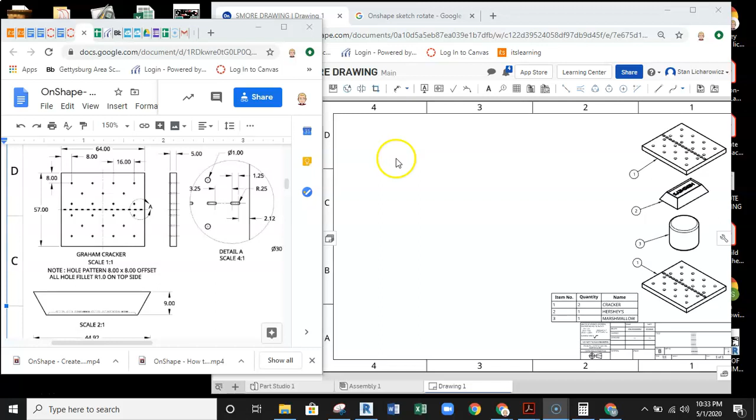Okay, in this portion of the video series, we're going to go ahead and set up the multi-view drawings for the graham cracker, the chocolate bar, and also the marshmallow seen here. So let's go ahead and start up here with the graham cracker and jump back into OnShape.

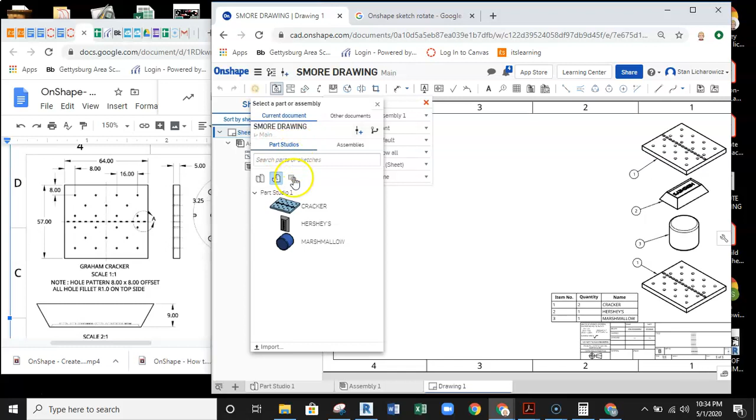We're going to go ahead and start looking for the insert view. From here, I'm going to hit the insert tab. I want to work with the part studios, and there's my graham cracker. Go ahead and select it.

I want this to be a 1-to-1, and I want to set up my front view the way that I want this to be seen. So I'm going to go ahead and start picking these different views to see which one of these is going to give me the view I have set up here.

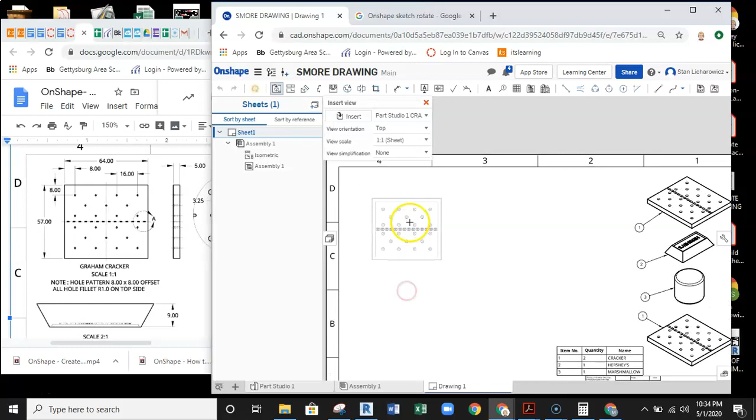And it looks like for me that top view is what it's going to be. So I'm going to go ahead and drop that top view, which is really going to be technically my front view. And then I'm going to go ahead and set up my right side view.

Now, it's not necessary to have a front, top, and right in this particular instance because you're going to gain all the information you need from these two views.

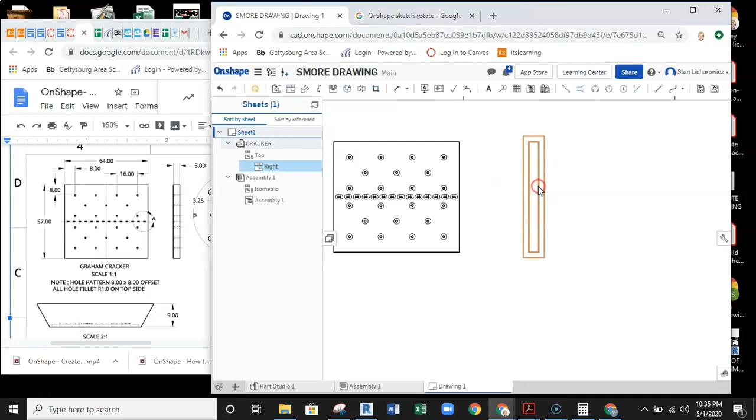So one of the first things I'm going to do in this particular instance is turn on these hidden lines because I want to show the hidden lines, since there are holes that run through there with little tiny fillets on the top.

And the other thing I also want to do is set up this detail drawing view, because we're going to be dimensioning that as well. So I want to make sure I have space for everything that I need to do here. I definitely want to pull this down a little bit.

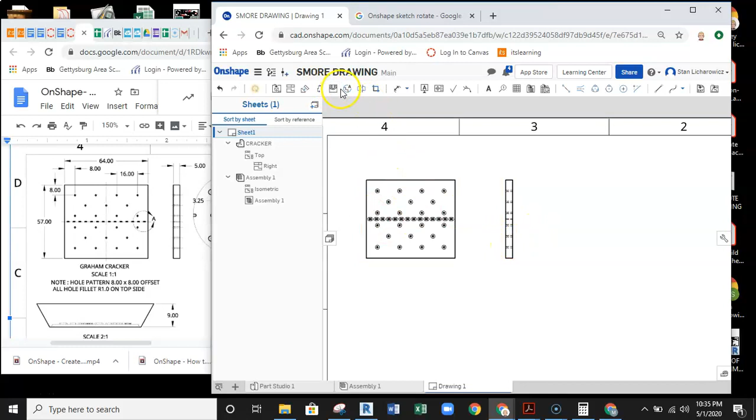So to do that detail drawing view, I'm going to grab that detail view, and I'm going to zoom in because I want to think about what I actually want to capture. What I want to capture is shown here inside those two arrows pointing at that A. So the center of my view is going to be right around here.

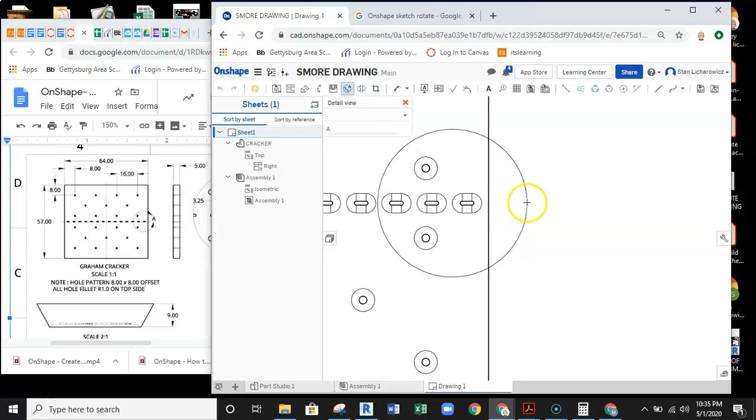I'm going to click and start pulling out, and then where my cursor is is where that A is going to show up. So I'm going to pull into about here, and then click again. That's going to go ahead and set up the view.

Now here's my view. I'm going to pull this over and then drop that in position. Now, this is telling me that it's a scale of 2-to-1. I'm going to go even larger than that. I want to go 4-to-1.

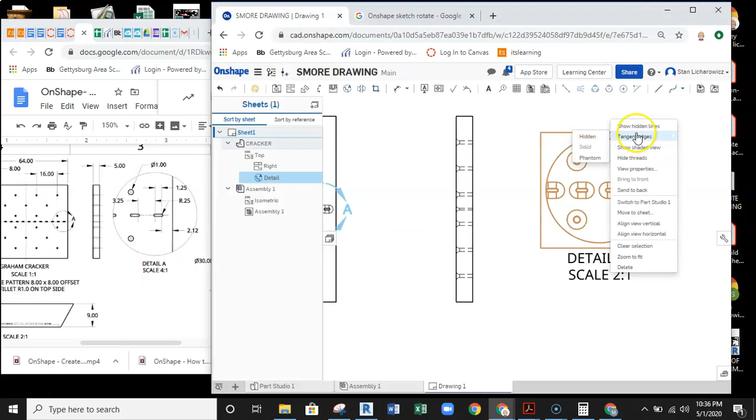So I want to go in, right-click, and get to the view properties on that. And we'll change those view properties to go 4-to-1, and it's going to get a whole lot bigger.

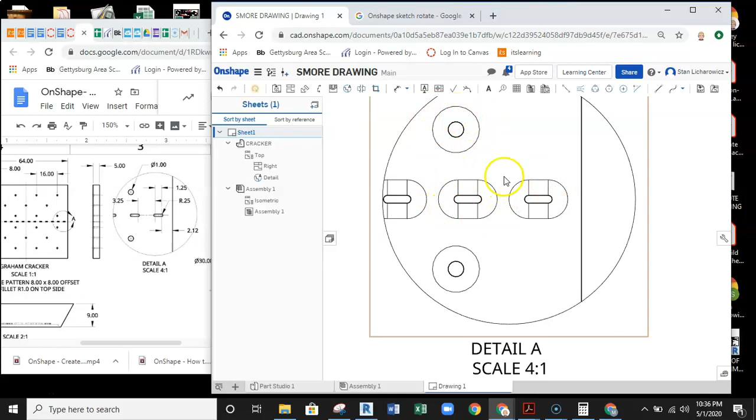What it's also showing here, these circles, they are the tangent edges for all of those fillets. I don't want that, so I'm going to right click and set tangent edges hidden. I don't want to see all that.

All right, so next thing I can do here is start adding all of my center marks and center lines. There's my center mark tool, and these little center marks are just perfect for what I'm working with here because these are such small features.

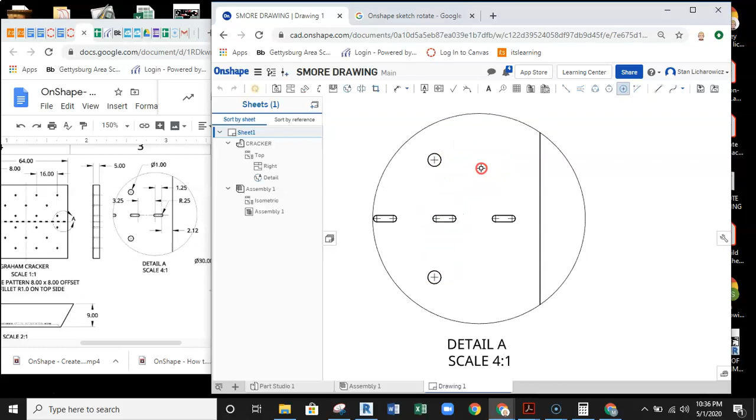I don't need to do any sort of extensions or anything like that - it would just make things a little more confusing. So I'll go ahead and grab dimension for this particular object, and it looks like I got a small issue here. Might need to go back in and update that.

Actually, what really needs to get updated is not the part itself, but the drawing units. Because remember, I'm in an ANSI A drawing file. I never set this up and told it that I'm running in millimeters.

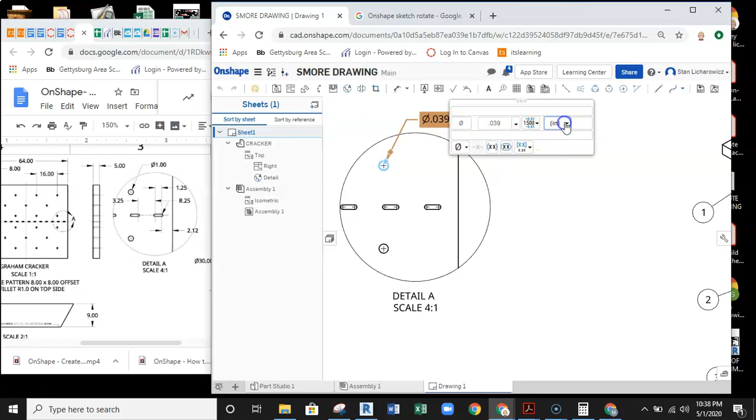So what I could really do here is select each one of these, right-click, and go into Edit, and change inches to millimeters. And we're not going to do all that - it's way too much work for each one.

If you hit this little wrench over here, then you can come over to the drawing properties display. I can just fly out here. This units can be dropped down and set to millimeters. So we can set this up in millimeters, come back to my drawing, close that, get rid of that fly out, and there's my 1.00 millimeter.

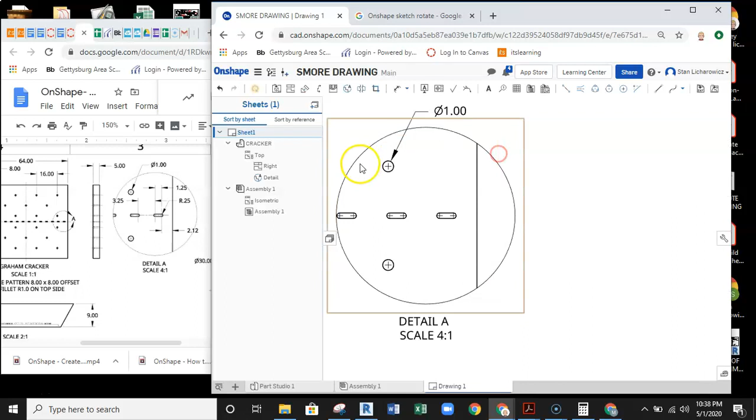So again, don't freak out if your dimensions aren't working right. It's not a problem, it's a units issue.

So with that set up, now we can go ahead and continue to dimension the rest of our parts. I'm going to go ahead and grab that radius, which should be 0.25, and that's correct. So pull that up into position. Now I've got to get the distance from center of slot to center of slot.

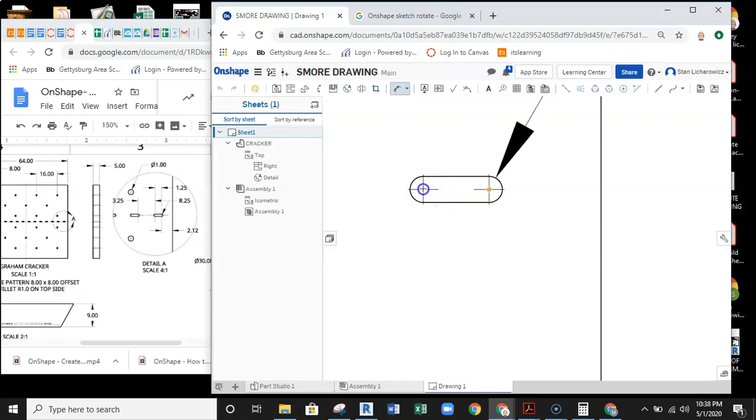I'm going to grab that there and do this again. Maybe I'll go from center mark to center mark - good thing I have center marks on there. So we'll pull this up, pull it out here to the side, and drop it into position so it's out of the way. Now I need to get some information here between these objects.

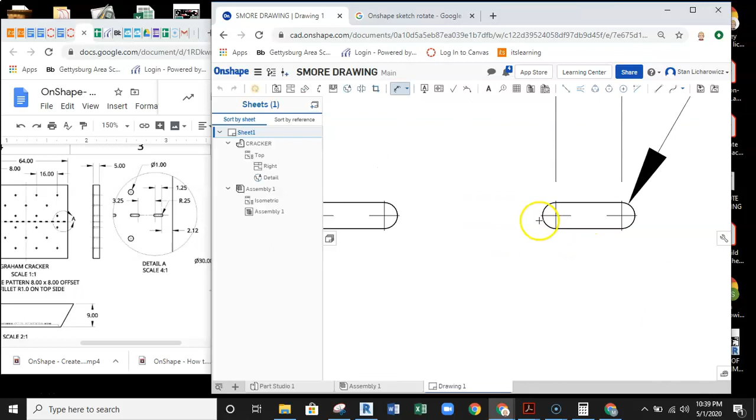Let's see if I can use center mark to center mark this time. That works. So if I pull this up, it might get a little cluttered - it's not too bad. I got to add some more information down here, so maybe I'll drop it over here like this. So that's the distance between there.

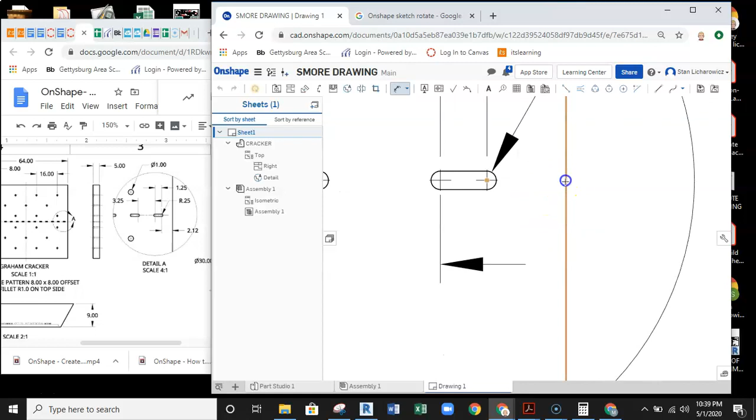And now I got to figure out how far from this edge over would I create this part. So we're going to set that up as well, and pull this down and move my mouse over here to set this up to be a little cleaner than trying to shove all this stuff into that small space. So as I pull back out and take a look at this, I can see I've got everything showing up that I need to. So now I can keep moving on.

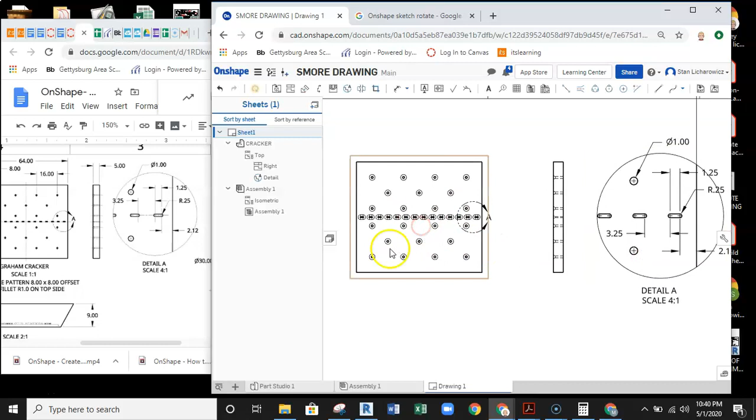I'll come over here to the graham cracker, and let's go right ahead and start dimensioning from - let's just start up here from this top corner. And we'll start with the smallest dimensions first.

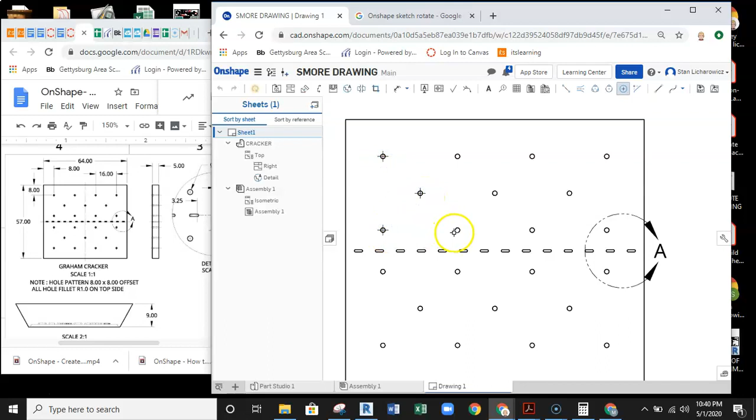We'll grab - nope, wait a minute. We don't have that, we have tangent edges on, and we don't have center marks. So first thing is to select, right click, turn off those tangent edges, and then I'm going to grab my center mark tool and work my way carefully through all these different little holes. Sometimes I really wish there was an automated center mark tool for something like this - you have to do some research on YouTube and see what's out there to make this thing work that way. So with that set, we're good.

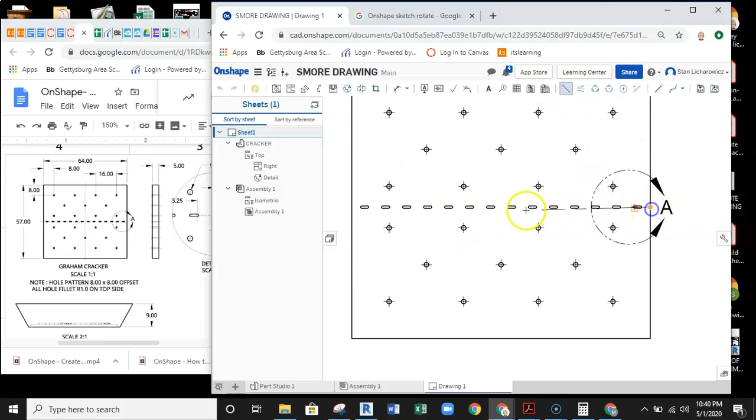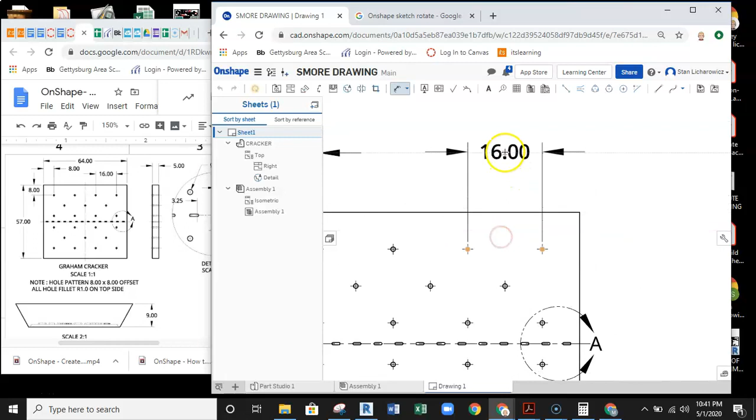Now we'll go ahead and throw a center line right down through this part because it is a symmetrical part. Center line tells us that one side is the same as the other, so we don't have to dimension everything. So now we can go ahead and start dimensioning the positioning of these particular hole features. That one is going to be positioned like so, and then we'll set this dimension to position this 8x8. We'll also add that note down at the bottom of this part. So keep going here and get this thing tidied up with the dimensions necessary.

57, 8, 64 - we're all good there. Now let's go ahead and get the rest of the notes set up here.

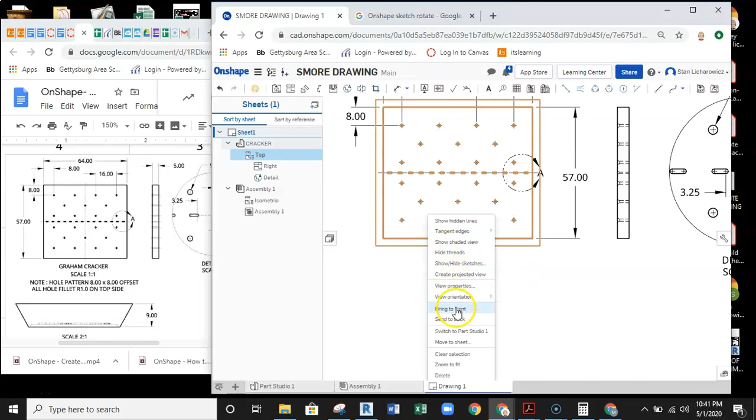So I want that scale to display. I'm going to left click, right click - can I find some type of properties here? Let's see, view properties, what do we got going on here? Yep, so let's see, scale label - I want that scale label to turn on. There's my scale label, good.

Now I also want to add some notation. So now I'm going to grab my A for my notes, and I'll pull a little window - see if I can stretch that out. Yep, that works. Select inside here and I can type this in. So this is my graham cracker - could probably also just call it cracker, but graham cracker is fine.

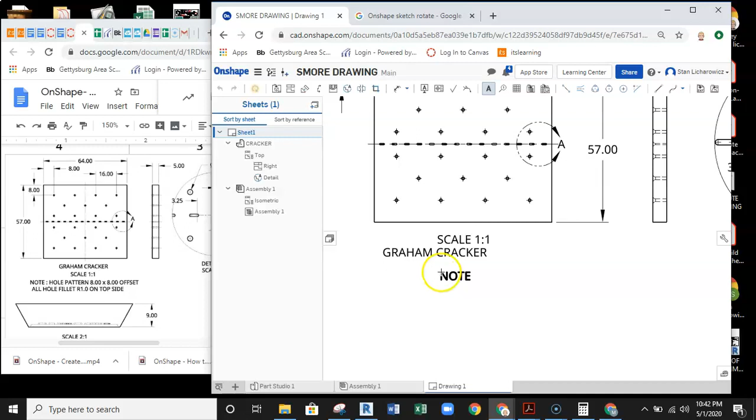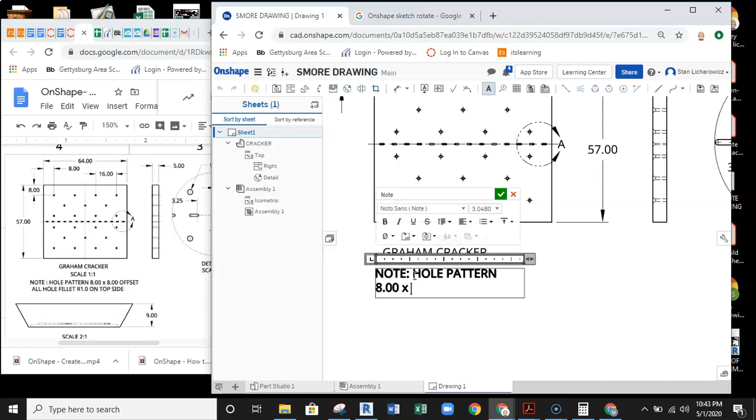And then now next thing, so I'm going to add this note for that hole pattern. All right, oops, spelled that wrong. There we go. So, a hole pattern, and I want this all to be up on one line. If I can get that up on there, good.

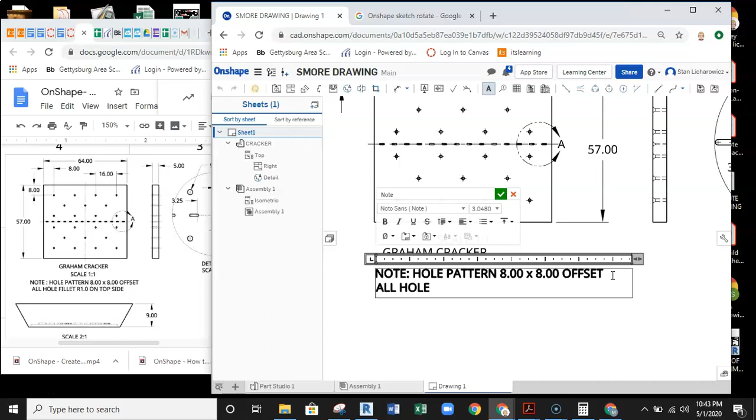Next thing I want to do is go down for a next line and then tell it that all holes get a fillet - it's going to be R 1.0, and that's on the top side.

Okay, there we go. So we have our notes, we have graham crackers set up, and I'm probably just going to do a little positioning here and make this look a little neater. Pretty much looking good.

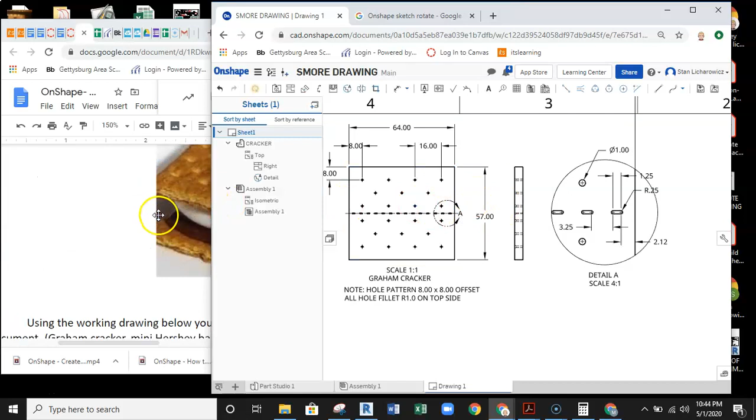Oh, one thing I did forget though is I can see I don't have my center lines set up here for bisector center lines. So we're just going to come in here real close and start adding these bisector center lines into this part so that you can see where the centers are for these little features. And these do help when you're trying to look at a drawing.

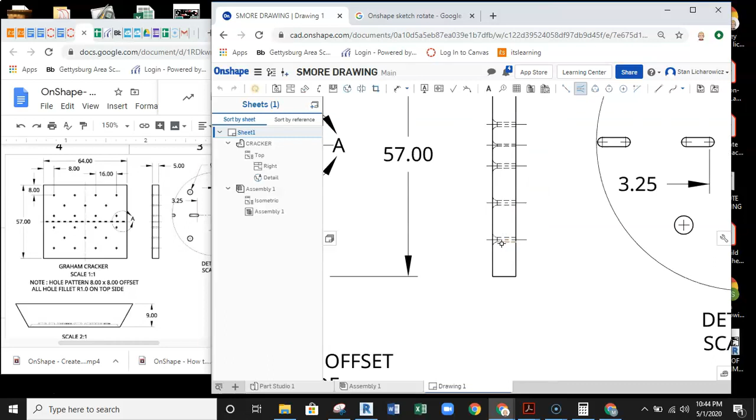Because with small features sometimes it's tough to see. All right, and oh, we also don't have the thickness of this part, so a few more things got to add here. So there's the thickness of this part. Drag this out here to the side. There we go. All right, now I think we're ready to move on to the chocolate bar.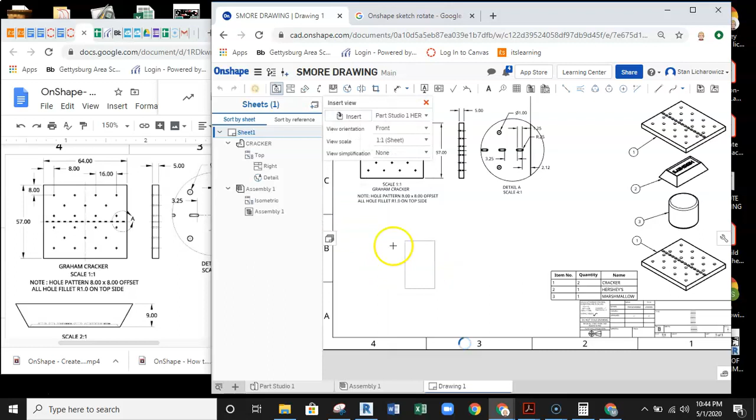All right, so we'll go ahead and grab the insert tool and hit the insert button again. This time we're going to grab that Hershey's chocolate bar, and we're going to set this up. The view for this thing is actually larger, this is a 2:1, so we can see a little bit more information on this drawing. So we're going to find that as a 2:1 in here somewhere. There's 2:1, grab that.

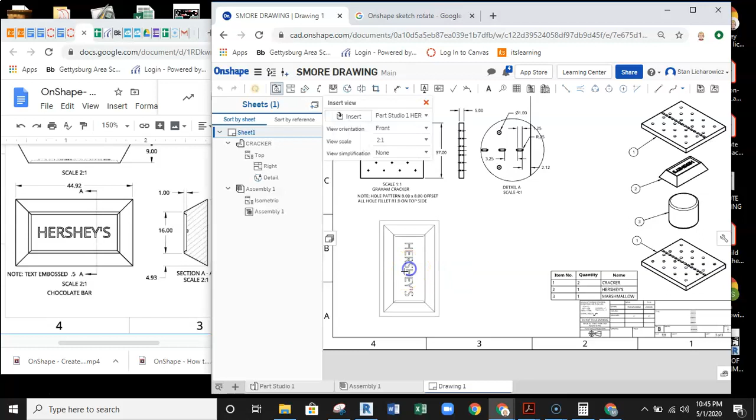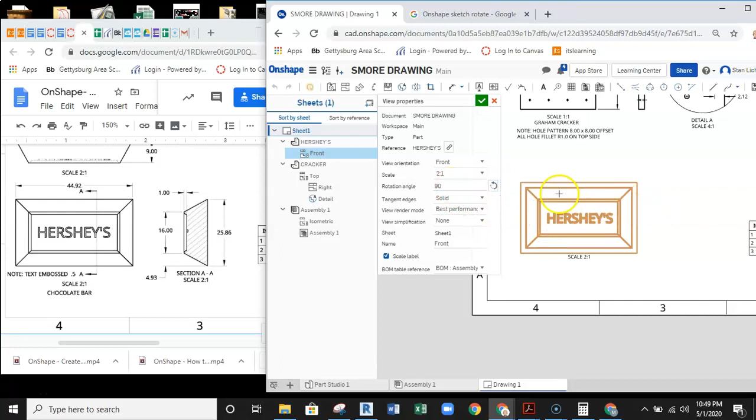We also want to set the view up, so we're going to have to do some movement, rotation. This would be the front view, but we're going to have to rotate it. To do that, I'm going to select the actual view, right-click on the front view, hit Properties. You can see there's a rotational angle, so I want to set this up. If I take this to 90 and hit the rotation button, I can see, well, I went 90, but now it's upside down. So I'm going to tell it to go 90 again, and now it's in the right position, by just hitting this opposite direction. So now it's in the right position. Hit the green check. Now I'm ready to continue laying out my parts and drawings here.

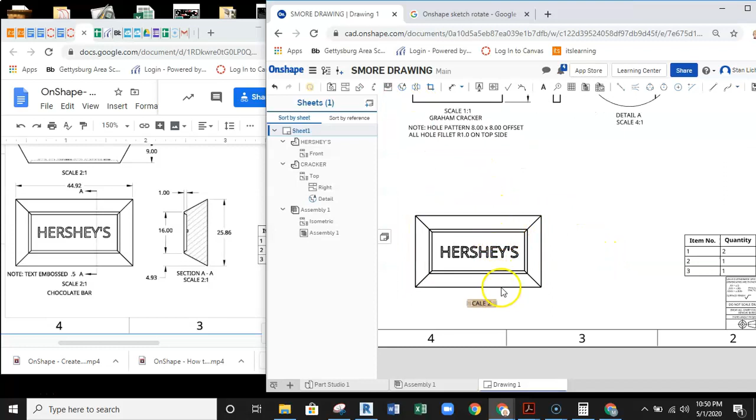So I'm going to move this down just a little bit and go ahead and set up that section view. A section view is as if a knife has cut the part in half. The section that the arrows are not pointing to is then removed, and you're looking at the actual material that's left on the right side. Think of these as knife marks on the material, knife marks on chocolate.

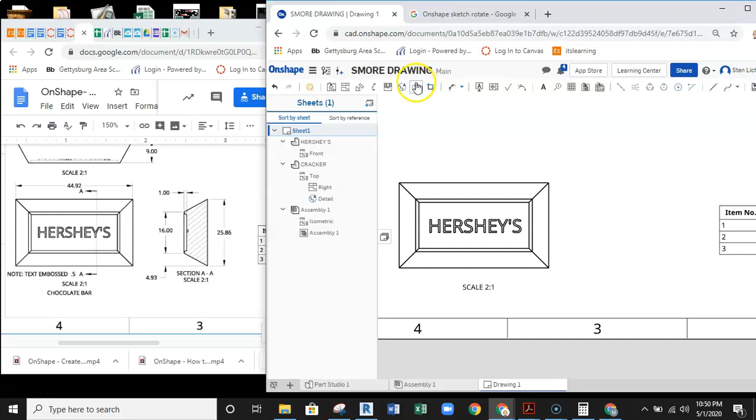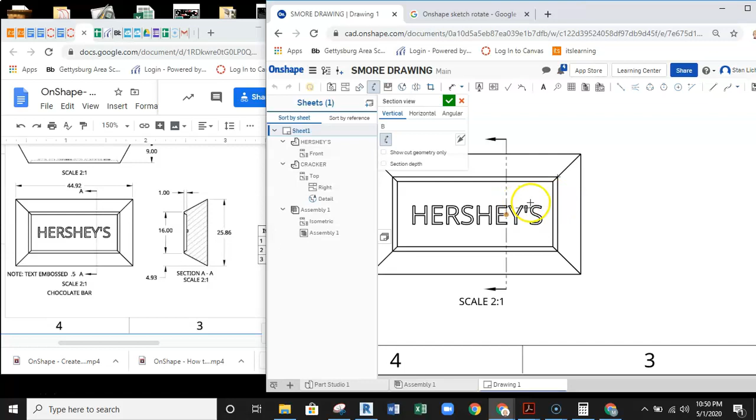So to do this, I'll grab this tool, section view. I'm going to select, this is centered on the part, and just move in somewhere about here and click. Find somewhere right there, click. So now I'm on the end of that E. Now I want to tell it which way to take my arrows, so I want my arrows pointing towards the start of the Hershey, and as I move my mouse over to the right, you can start to see that section show up. With that in position, I'm going to left click, and that will create my section view, and now I have a section view set up.

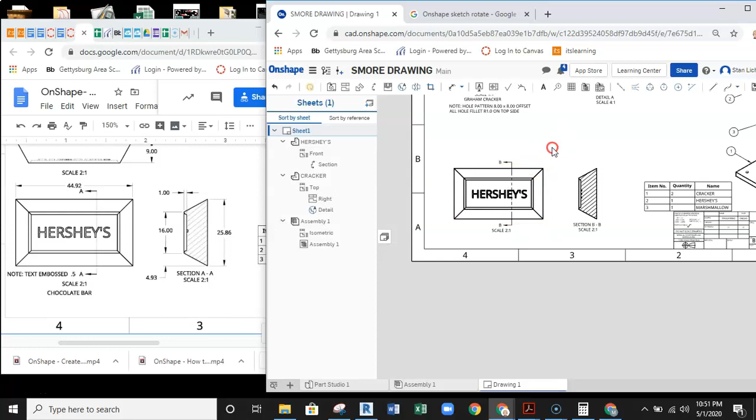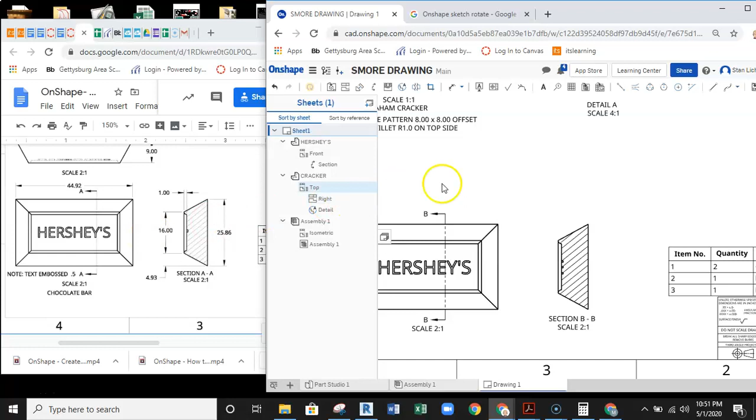Now, a section view should always, if this is the first section view on a drawing sheet, be set up as AA, but given that I did this detail first, this will be A, and this feature will become B. That would be fine for this particular drawing. If you look at this sheet, you can see, well, they both say A, and there are conventions that say you could go AA or AB. I'm not going to be a stickler for this in this particular instance.

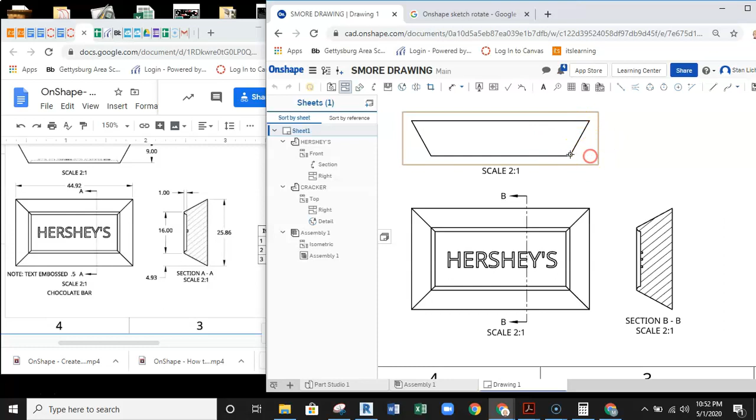All right, so with that in position, we're going to set this up and continue to dimension these parts. We'll go ahead and grab the projected view, pull this up into position and drop that. We'll right click on this and get the hidden lines to show up. Escape, right click, hidden lines, and we'll get the hidden lines.

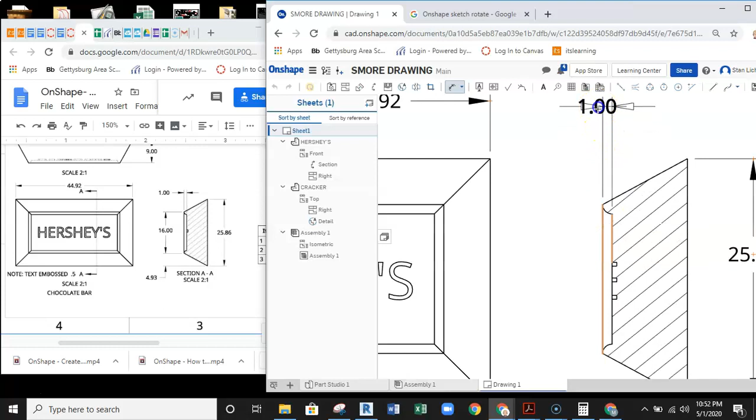Now we're just going to go ahead and add the rest of the dimensions to the part. Pretty much from here on out, this is going to be standard dimensioning, and the rest of the information you would have already been definitely acquainted with. So I'm not necessarily sure we need to continue through the rest of everything here or not.

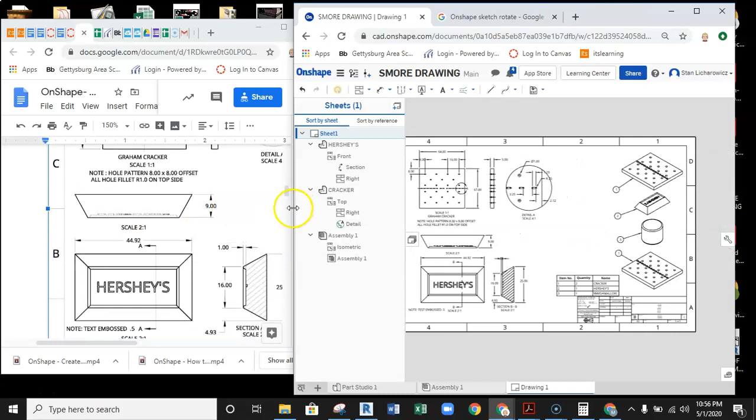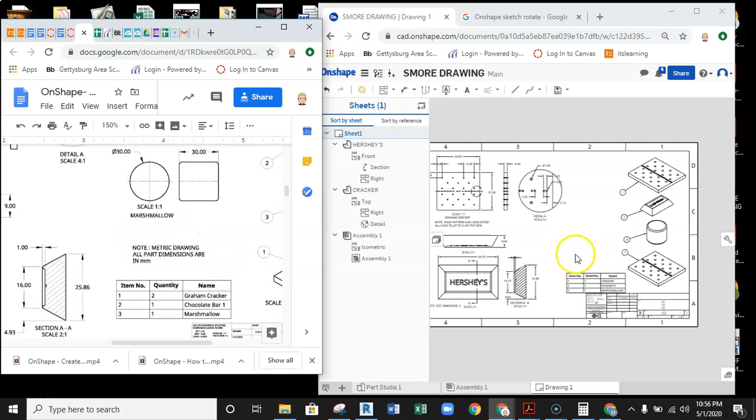Okay, I'd stopped the video, finished the dimensioning for that Hershey bar, and I'm going to leave you to finish up the rest of this drawing, because the last thing you need to do is add this marshmallow, and hopefully by now you are comfortable with adding that marshmallow to position, setting up those 2-point center lines. The last thing I'd definitely tell you to do is add a note: make sure that the note metric drawing, all parts are in millimeters, is on the drawing as well. So hopefully you're able to follow through this and take care of getting this working drawing made up, and get your first s'more working drawing finished up.